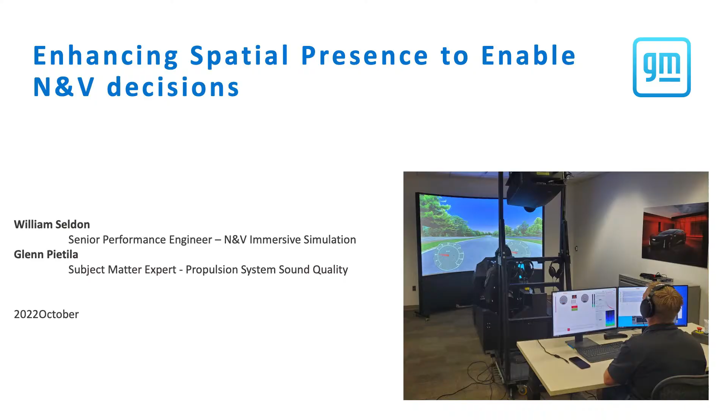The title of this presentation is Enhancing Spatial Presence to Enable N&V Decisions. We'll talk about that more as we go through, but really what I'm trying to talk about is enabling immersion into the noise and vibration. I have a cool little story I put together for you, and I have to give credit to my partner in crime, Glenn Pietila. He's not here, but he's probably virtual. He does a lot of our sound enhancement work, so he's sitting there and I'm sitting driving the sim.

Let's go over what we're going to talk about. What's the motivation for increased immersion? I have a little story and our little roadmap, and then I'll actually talk about examples. We have a little project that we did, we're trying to do some visual work, and then kind of what's next on our roadmap, looking at object-based audio.

I'm not going to read that quote because one, it's hard to read, and two, I wish I could write like that. The person I pulled this from is quite good at writing, but my takeaway was when you're giving these demonstrations in the NVH simulator and the cockpit, everyone desires to be immersed into the sound, whether they tell you or not. Because a lot of times they say, oh hey, it's just an engineering demo, things don't have to be totally right with the visuals, things don't have to be totally right with the acoustics.

If you really want to start replacing prototype vehicles, you really need to start pushing into immersing people into the noise and vibration so they have this emotional connection with it. So this presentation is more about talking about kind of the soft side of NVH.

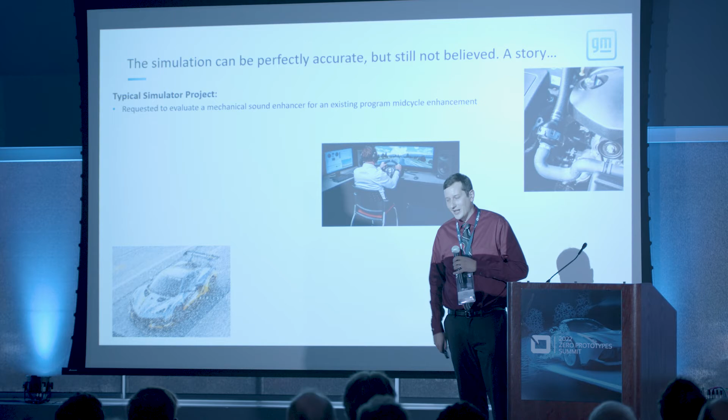So here's my story. I had a perfect simulation. I was quite proud of myself. It was a request that came from our performance car team. We had this mechanical sound enhancer. For those that don't know what a mechanical sound enhancer is, it's a little device that plugs into the induction. It resonates and imports sound into the cabin. Some people love them, some people hate them, but that's not the point of the story.

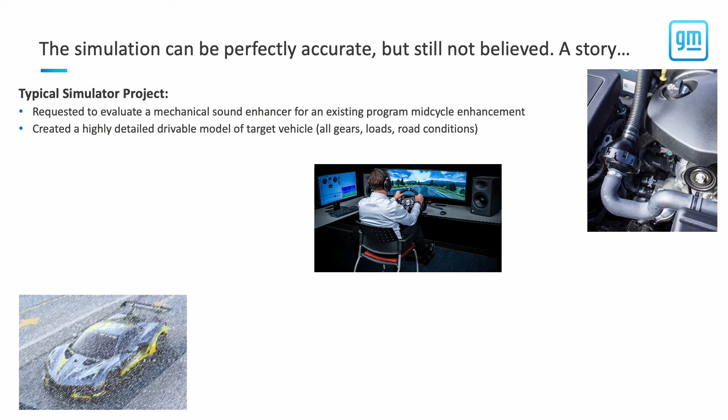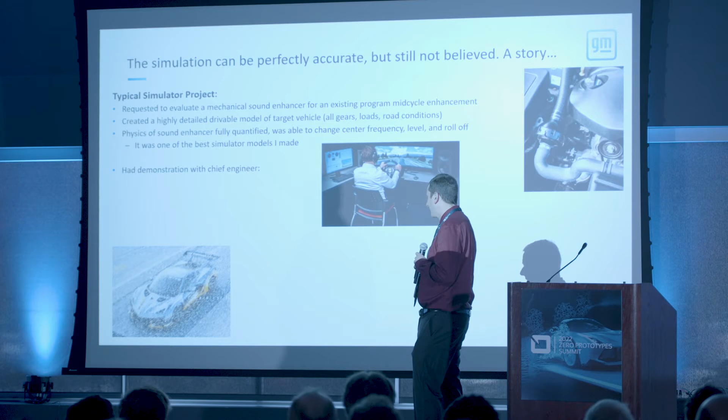Fully quantified the physics of the sound enhancer. They're pretty simple devices - they have a little membrane that vibrates, and you can tune that membrane up and down. You can put foam in them and all sorts of things. So I had the physics knocked perfect. I had a really good full driving model. I was rolling into this demonstration with my chief engineer with a pretty big ego going on.

And then he drove it around for 5 minutes, and he said, 'I don't feel like I'm in the car, Will.' I said, oh, this is not going the way I need it. And then - it's a fair bit of recovery there - but, I wish I could say he told me exactly what he needed to be immersed. But...

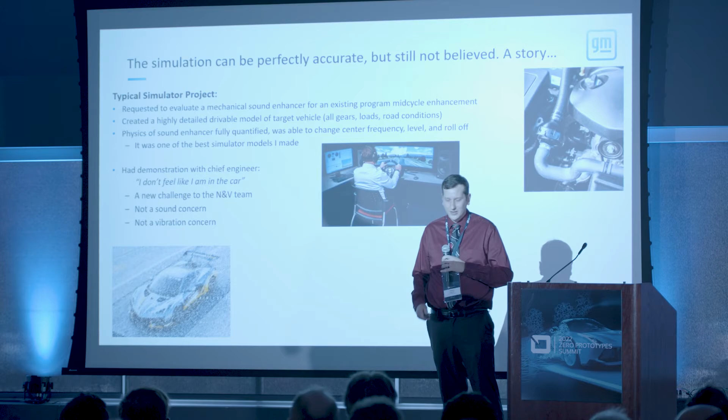It took some time, and it was a new challenge to me, because usually when you're having these demonstrations with chief engineers, it's a sound concern, it's a vibration concern, it's cost. I've never had a chief engineer say, I'm not immersed in your demonstration. That took me back a bit. That's a new problem, and we'll talk about what I did on the next slide about how to try to solve that problem. There's some definitions here.

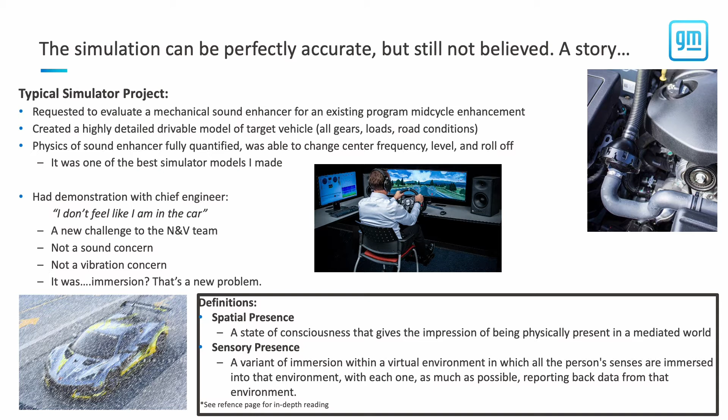It's really helpful if you're going to search for things in literary publishments and things like that, but for the most part we're focusing on sensory presence. So basically, what am I trying to do when I have a demonstration with my chief or any decision maker, or even just engineering? What can I do to really bring their senses away from the state of just existing, standing in this room or sitting, listening to a sound, to 'I am listening to my car.' Things like that. So we'll bring this all in here.